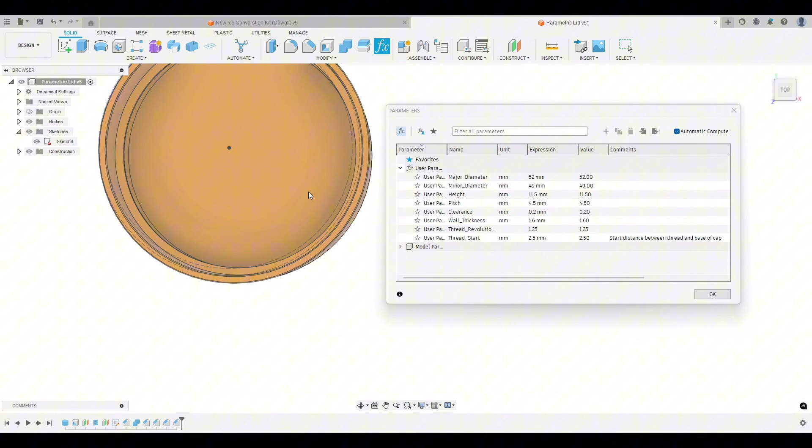And then you can change some things to your preference. So clearance is going to be how tight of a fit it is. So I have a little sketch here that I can turn on. And so this inner circle here represents this minor diameter, and the outer circle represents the major diameter. So if we go to a top view, let me switch my camera to orthographic so we can get a better look here.

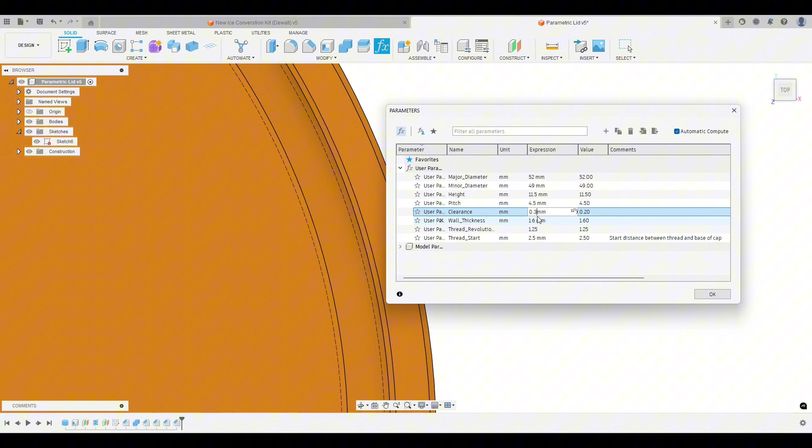So you can see this line right here is the inner diameter of our lid. So here's the major diameter of the jar or container. Here's the inner diameter of the threads, and then here is the minor diameter of that container. So right now we have a clearance of 0.2. So if you wanted it to be a little bit more sloppy, or if your printer has some tolerance issues, you could bump this up to 0.3, and you'll see it update on the left. And there you can see the clearance has changed.

So what I typically do on a smaller lid, like that Mountain Dew bottle, I would just do like a 0.1 clearance. And then for larger ones, like the larger bottle that you saw me make in the beginning, I might do a 0.2 or even a 0.3. It's something you can play with and see how much slop you need.

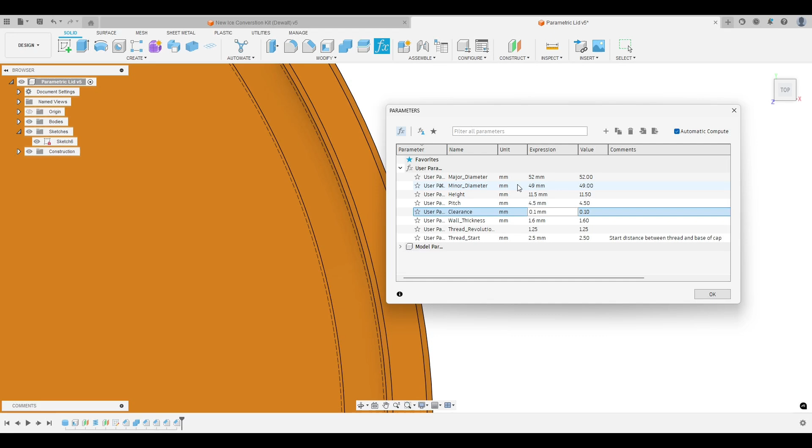The wall thickness, let's get back out here, and I'm going to turn my camera back on to perspective. The wall thickness is exactly what it sounds like. It's the thickness of the wall, so you can bump this down to 1.2, whatever you want. Typically, you want to put this in increments of 0.4, because if you're using a 0.4 nozzle, that's the width of the nozzle. So 1.2 works well, 1.6 works well, and whatever you want.

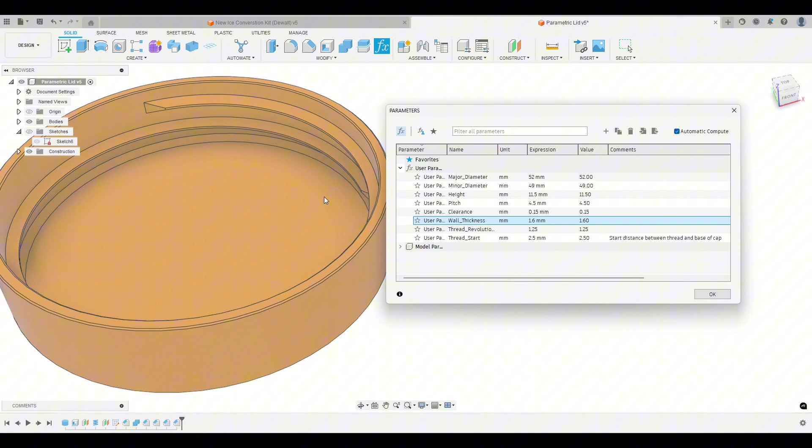The thread revolutions, that is how many times it rotates around the cap. Again, this does not have to match the bottle or container that you're measuring.

As long as they have the same pitch, you'll be okay. But obviously you want the threads to fit inside the cap. So you wouldn't put this at like 8, because obviously then those aren't going to fit. So keep it at 2, depending on the height of your lid. So even 2 revolutions with this height doesn't work very well, so we'll do 1.5.

However, there's another thing you can change if you do want more revolutions, and that is the very last input, the thread start. So this is taking the measurement from the base of the cap here up to the first thread. So you can see I have this set at 2.5 millimeters. If you needed some extra room, you could take this down to 1, and you can see the thread's lower. I like having a little space right here, but that is also to your preference. So anyways, you input your things and print it out.

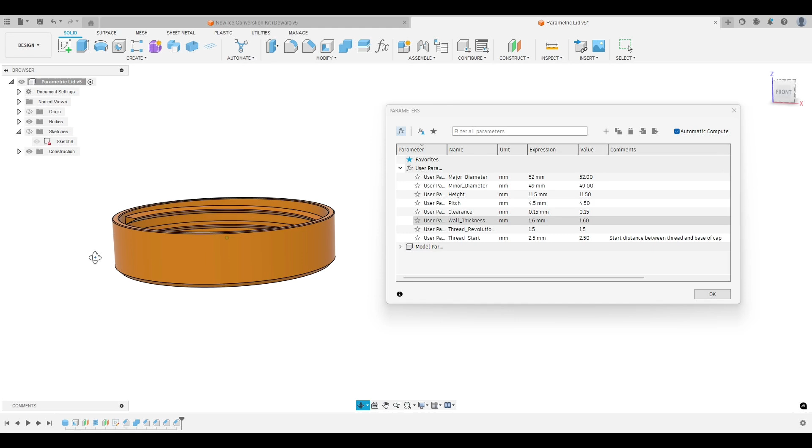Now, a lot of people that have commented are concerned about printing this steep angle here. Remember, these threads are pretty small and they're not printing straight across, right? These are printed at an angle. So when you're printing these threads, the printer doesn't have these huge overhangs, just because parts of this thread are on different layers. So I have not run into any problems with these steep overhangs as of yet. However, I'm also not going to claim that this model is going to work for every single possible lid you can encounter. It has worked for all of my lids so far, so that's all I can say.

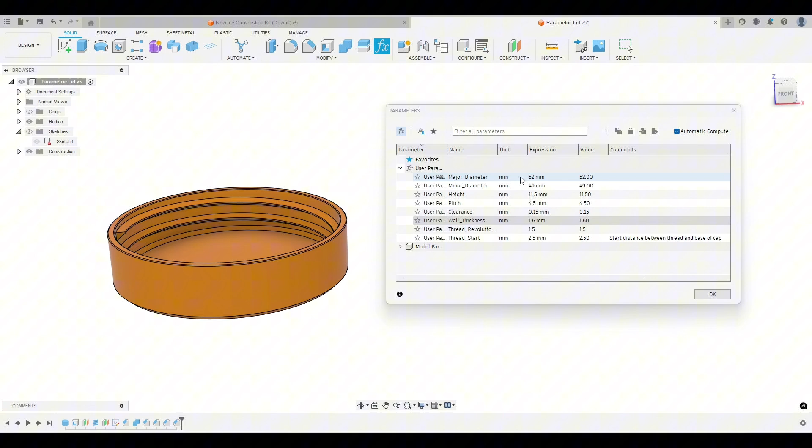But anyways, there you go. Major diameter, minor diameter, height, pitch. So you've got to measure those. And then these are to your preference. And as long as you get your measurements right and you know what clearance your printer is capable of, you can get a really nice fitting lid.

The last thing you might need to do is change these chamfers. It's a little bit harder to make these parametric. So I have these two little chamfers right here, which I believe are the last two things on my timeline. This inside chamfer and outside chamfer you can change, which is right here, depending on how thick your walls are, and then the chamfer on this top lip you can change as well if you need to. And to change those, literally just double click on it and then re-enter your size.

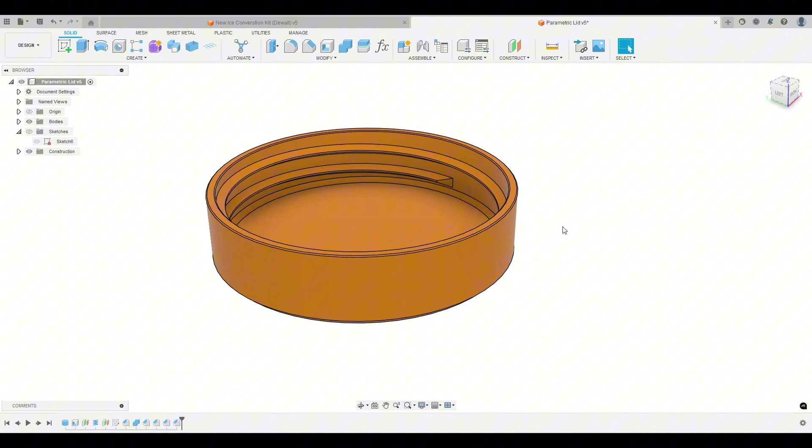Okay, next part of the video, I'm just going to very quickly show you how to measure your container or your bottle cap. All right, so I was going to show you how to measure it with my calipers, but

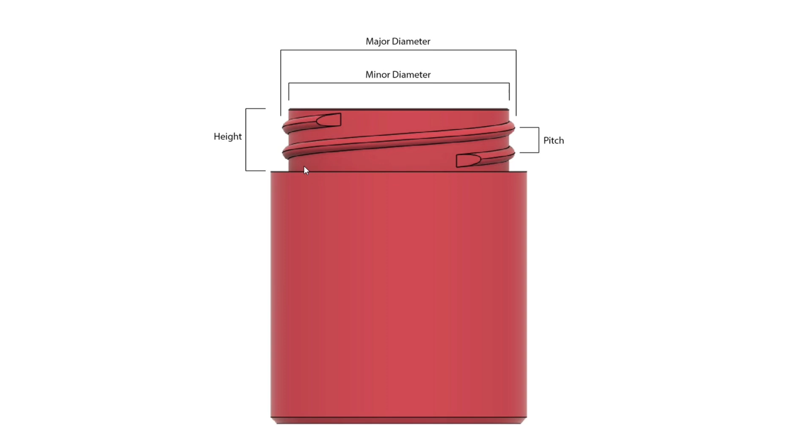So I'm just going to show you with this diagram that I created. So here are the 4 measurements that you need. The easiest one is the height. You just need to measure from the opening to the base, to the transfer ring. A lot of times there'll be a little ring at the bottom below the threads that goes across, and you just need to measure your height so the lid will fit on the cap or on the container.

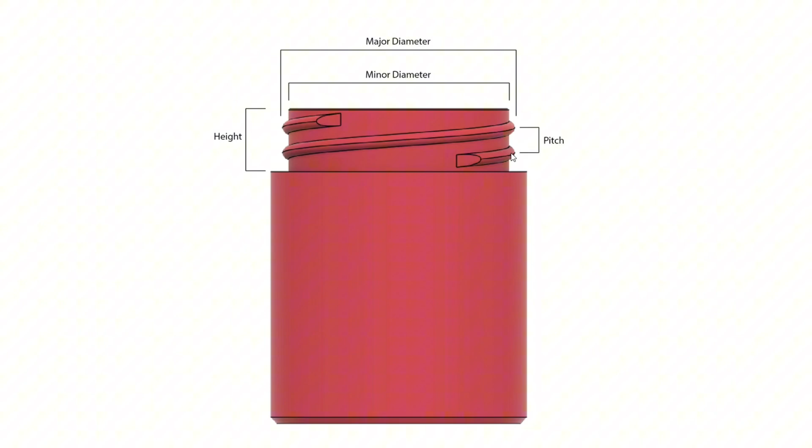So the pitch is the next one, and you just want to measure the distance between either the middle of each thread, or you could do the top of each thread, but basically you just want the distance between the threads with 1 revolution. And then you have your major diameter and minor diameter.

The major diameter is the diameter including the threads, and then the minor diameter is the outside diameter not including the threads. If you don't have a good place to put your calipers for this minor diameter, you could measure the height of the threads and then multiply that by 2, right? 1 for each side. Subtract that from the major diameter, and that will be your minor diameter.